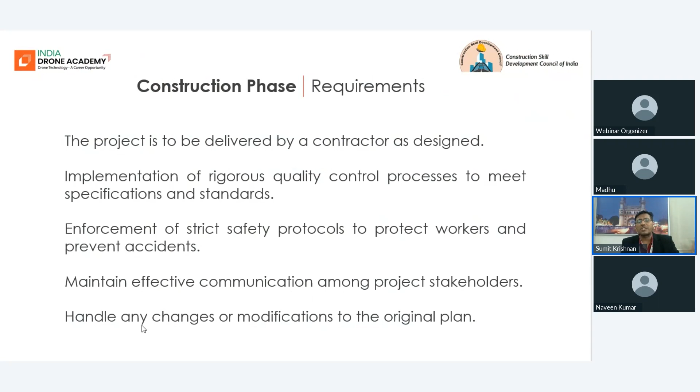So these on your screen, 1, 2, 3, 4, 5, these 5 points are the important requirements of any construction phase in the construction project work. Now, when a project engineer wants to meet these requirements, there are some challenges that he faces. What are those challenges? First challenge is to get a skilled labor. If the laborers are not skilled, automatically the progress will slow down.

A project should meet all the regulatory requirements. Sometimes there are chances that the construction project work may cross the budget due to unexpected expenses. Like sometimes there may be chances of repeated works. Some work is done and it is not acceptable, then again the work has to be repeated. So that also increases the overall budget.

If the design changes that are required to be implemented are identified very late, then also it will affect the cost and the timings of every team. Because during construction work, there is not only one team who is working, there are several teams who are working together. So if one team delays their work, the schedule of all of the teams will get affected.

And maintenance of the inventory records, this is another challenge, because every time you have to order the raw materials, and you have to track whether the raw materials available on the site are enough or not. So all these things, and a record of all the important machineries that are available on the site, all these things need to be recorded in the inventory. These are the challenges of the construction phase.

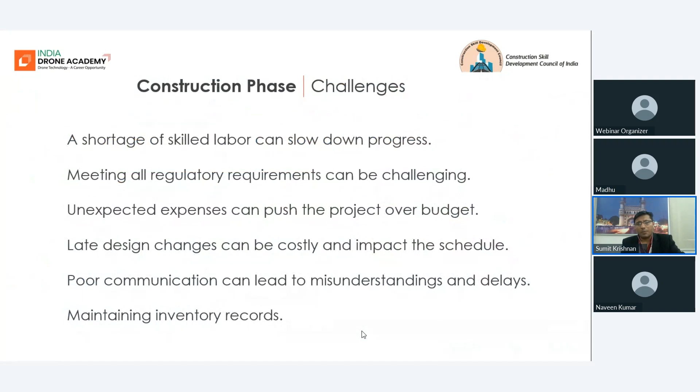If we talk about construction progress monitoring specifically, which is our topic today. During the construction phase, construction progress monitoring is a very important stage that ensures that all the challenges are overcome so that the requirements can be met. So construction progress monitoring, what does it mean? Is it just about tracking the activities of the laborers who are working on the site? Is that all construction progress monitoring means?

I will say no. If you try to get into the detail of this term, construction progress monitoring actually involves many things within it, which we shall discuss today, and how drones can help a construction project engineer to effectively do this construction progress monitoring. This construction progress monitoring is about weekly or monthly site assessment. And this assessment is done to ensure that whichever work is completed matches well with the plan and design that was already done in the previous phases. Okay.

So in construction progress monitoring, how will the assessment be done? A project engineer has to visit the site and he will verify the level of work that is existing, that is done, and he will also inform all the investors about the progress. And the information is not just on telephone calls. There is a well documented procedure which he has to prepare. He has to prepare proper documentation after his visit, and he has to share this with the project engineer, with the investors, with the end user, with everyone. He has to share the progress report. So let us move ahead.

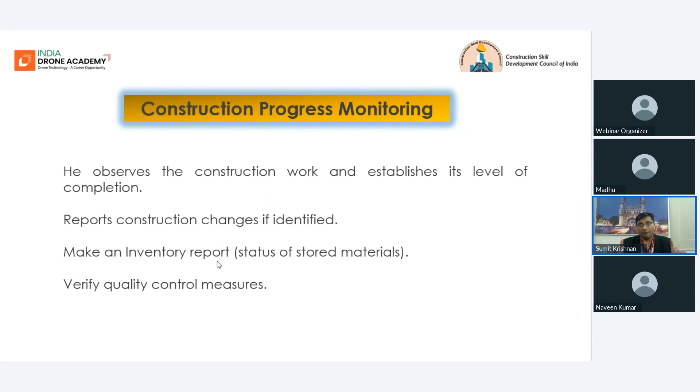There are some raw materials that are always getting purchased for the construction work. Those raw materials are to be recorded. He also has to note down all the active machineries on the site that are functioning, because those are all very costly items. So proper inventory is required. And then it is the same project engineer who also has to ensure that the quality control measures have been taken and these are implemented. Okay.

So what is the difference between the traditional method of progress monitoring and a drone based progress monitoring? Let us compare. The traditional method of progress monitoring involves that a project engineer should walk through the site on foot, through the entire site, each corner. And this may take multiple hours or sometimes a few work days if he wants to make the report complete. And sometimes there are chances that he may miss some of the sections of the construction site, because those sites may not be accessible to him.

Like he can be just on the ground. He cannot climb the unsafe structure to identify if the structures are well fixed or not. So he cannot go to the top of the unsafe structures. So all these limitations will not allow the report to become a comprehensive report. That report will definitely not be a very complete report. It will lack a lot of information about the construction site.

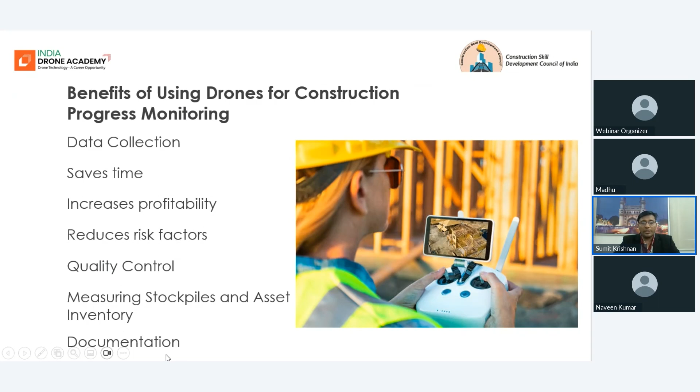When I'm talking about data collection, drones are capable of collecting large amounts of data that is not traditionally possible by just capturing with the eyes and documenting everything in the report. Drone data is of multiple types. It will take photos of the site, which will show you the progress of construction.

Drones will capture very clear, high definition videos, which will allow a complete overview of the infrastructure. You are able to capture the infrastructure from any angle, any orientation, where manual inspection was not possible. And drone data can also get you a 3D model or maps of your construction project site, and this will help you in further designing, planning and analysis.

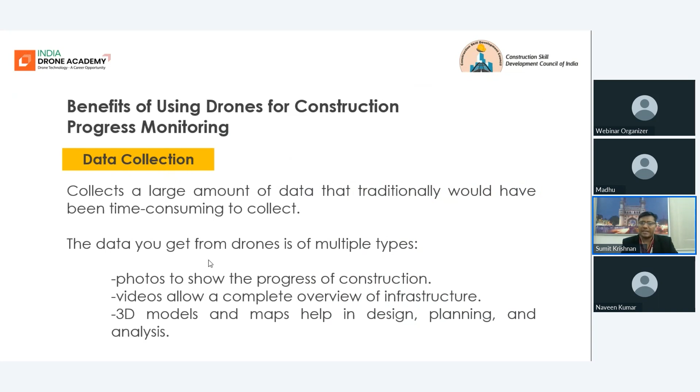The drone can produce orthomosaic maps, lidar scan maps. It can get you thermal maps. These all maps carry details which are impossible for any human eye to see. Okay.

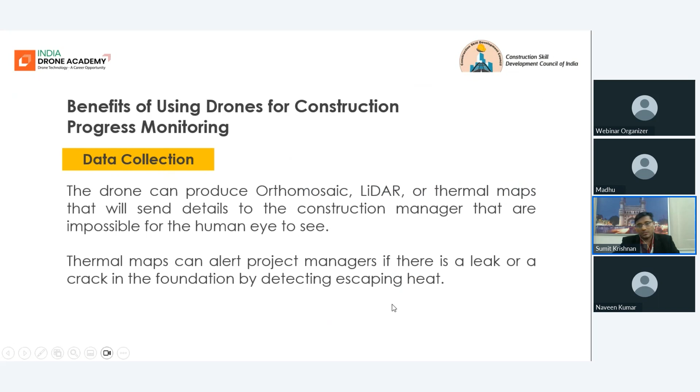Thermal maps can alert the project managers if there is a leak or any crack in the foundation by detecting the escaping heat. We can see here, this is one of the buildings, and this building is captured by a thermal camera drone, where one can see the temperature patterns on the walls of the building.

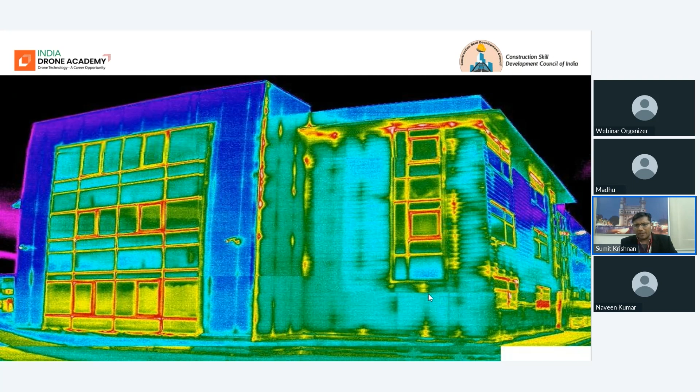So this thermal scanned picture of this building can give you the information about the heat leakage issues, which are those surfaces that are making the heat flow off the structure. After the construction, buildings have one very common issue of roof leaking. Heat escapes from the roof. So all these things can be detected using the thermal cameras.

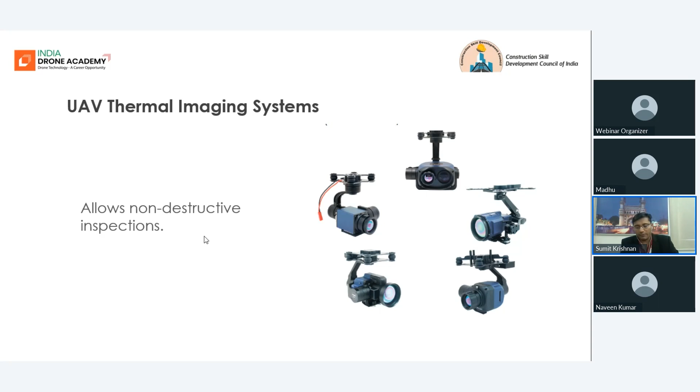Okay. So what is the benefit of using these thermal imaging systems? These thermal imaging systems on drones help non-destructive inspections. Okay. These look very simple, but their results are very beneficial. Many construction companies are now taking help of these thermal imaging systems. Believe me, just go through the internet and find out more about the thermal imaging systems of UAVs. UAV means unmanned aerial vehicles. You all know. You have attended the first class, so you all know these terminologies.

And what is the benefit of this LiDAR scanned image of the building in construction? The advantage of having this kind of model is it allows very accurate measurements. Okay, you can measure the length of the structures that comprise this building, and you can just match it with your design layout. And believe me, these allow very accurate measurements. I have included this detail.

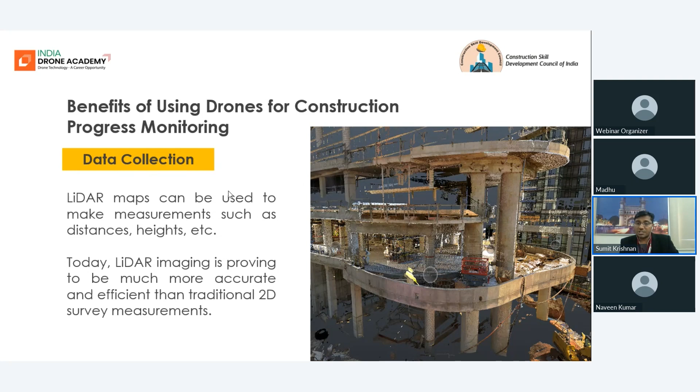Today, LiDAR imaging is proving to be much more accurate and efficient than traditional 2D survey measurements. So during construction progress monitoring, this kind of data from the drone can be very, very helpful for the project engineers. This is another image of the construction site.

Another benefit of using drones for construction progress monitoring is time saving. Drones save lots of time on inspection and communication. Of course, it doesn't matter whether your construction site is a large scale construction site. Your drone can very quickly fly, collect the data and get it to you in minutes. Okay, it increases the profitability. How can it increase the profitability? Because using drones, you are also reducing some unnecessary labor on the site.

For example, you may be asking some of the laborers to go to the top of an unsafe structure and do the inspection work. So why put those workers in a situation of risk when the drone is with you, which can very easily go to that structure and take a complete 3D image of that object, and this can help you reduce the cost of your project.

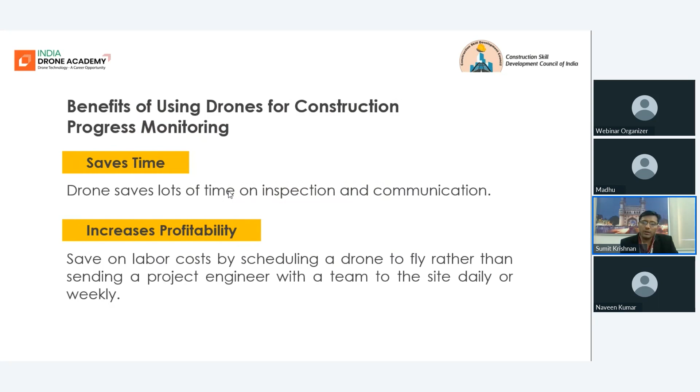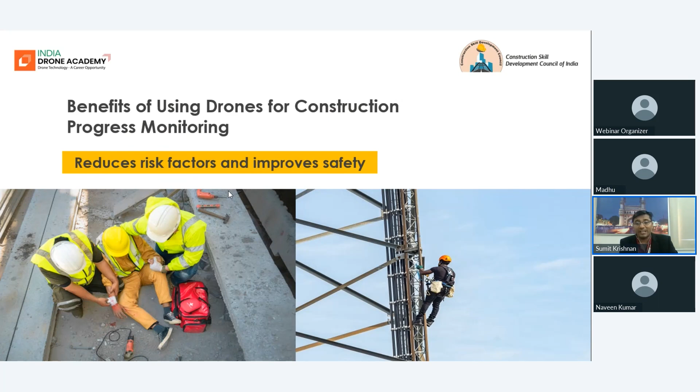Okay, so I have already discussed this point with you, that it reduces the risk factors, and therefore it improves safety. Okay, you can see in the right image, the worker is climbing the structures, and it is really very unsafe for him. There are many instances where workers have fallen to the ground and lost their lives. Such things can definitely be avoided if you are using drones in your construction.

Okay, quality control inspection. As I have shown you, during construction progress monitoring, quality control inspection is one of the important responsibilities of the project engineer who visits the site. Right, we have seen the responsibilities of the project engineer who has to visit the construction site for progress monitoring.

Quality control inspection is one of his important responsibilities. Using drones, you can easily detect any threats, even the minor cracks and defects which are associated with your buildings, your construction site. There's a very high chance these defects can be missed from the ground level. You cannot see that, but drones can get you the information of these minor defects, and therefore it enhances the quality control of your project.

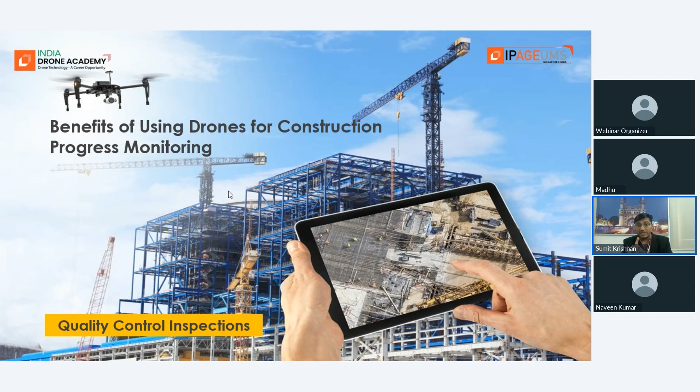And the importance of quality control, every civil engineer and person involved in construction knows, because they have to meet the regulatory requirements and compliance. Right, the next important benefit is measurement of stockpiles and asset inventory. What is a stockpile? A stockpile is maintaining the stocks of the raw materials that you are using for the construction work. So the drone can easily calculate through LiDAR scanning what volume of stockpile is available with you at the construction site.

And it is not just the case. Even during construction progress monitoring, sometimes you have to do some filling and cutting on the site. Some portion of the ground has to be cut, while some portion of the land is to be filled. So how much earthwork is required? You all as civil engineers must be familiar with the earthwork terminology. How much earthwork is required if you want to do this much cut on the land? That amount of earthwork can be calculated with the help of these drones.

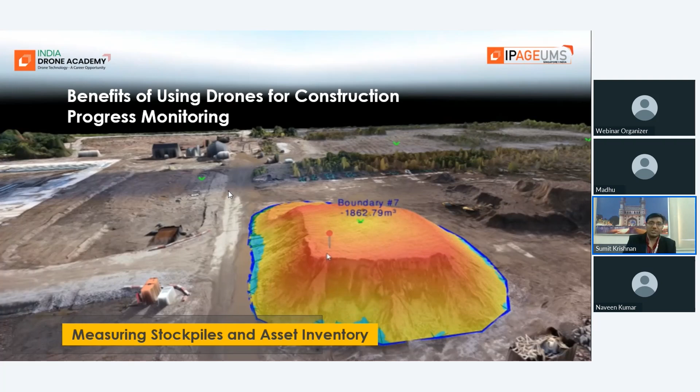And believe me, drones can get you a very accurate value of the amount of earthwork required. So you don't have to unnecessarily go on and start cutting down the land. You will know in advance how much is to be cut.

Documentation. When the site visit gets completed, the construction progress monitoring still does not end, because the project engineer has to make a good documentation report. First of all, when you are using drone images in your documentation, it will make your report very complete and very easy to understand. And also all the drone images have geotags associated with them. Sorry, the sentence is incomplete here, but I can help you in understanding. All the drone images have geotags associated with them.

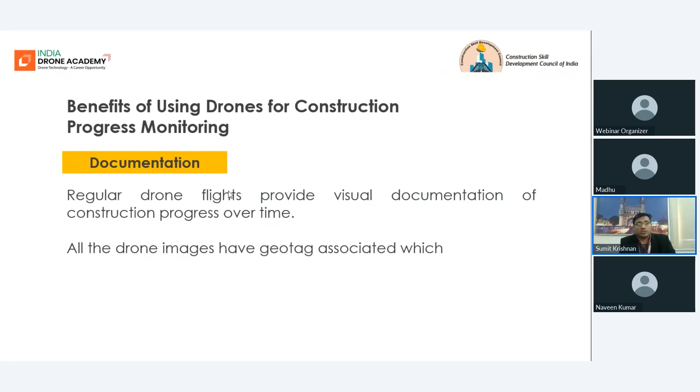Geotag means when the drone is taking images during its flight, those images have latitude and longitude coordinate data connected with them. So when you copy the images from your drone, you don't only get the images, you get the latitudes and longitudes of those images as well. That is how a 3D model, a complete exact replica of the site, can be created using various photogrammetry software like Pix4D. So this is the importance of geotags with drone images.

So overall, we can definitely say that if we are using drones for construction progress monitoring, it is helping you with a lot of things. You can do the quality control, you can do the documentation work, and we have seen the types of data it collects are helpful in various ways. It also eliminates the risk of making workers walk across unsafe structures. It has very wide coverage, it takes very little time, and it is comparatively not that expensive. Believe me, it is not that expensive.

If you're using drones, it will help you build a reputation in the construction industry, because these visuals from drones combined with a regular traditional progress report become overall a powerful tool. And this can develop strong relationships with the clients, the investors, and the management. So I hope how beneficial the drone is for progress monitoring and documentation purposes is very much clear to you.

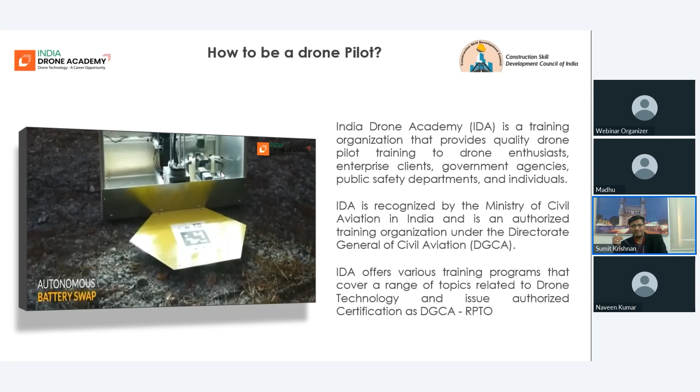So this was a short introductory video of our training academy, India Drone Academy, which is headquartered at Hyderabad, and we are expanding our campuses pan India, and we provide the basic drone flying training plus the specialization courses on drones on various applications. Okay.

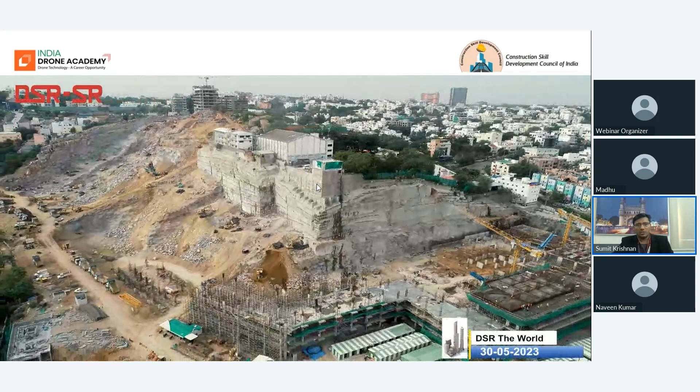So now this is the second video, which will give you a glimpse of construction project monitoring done by our company for DSR site. So this is just the short glimpse of it.

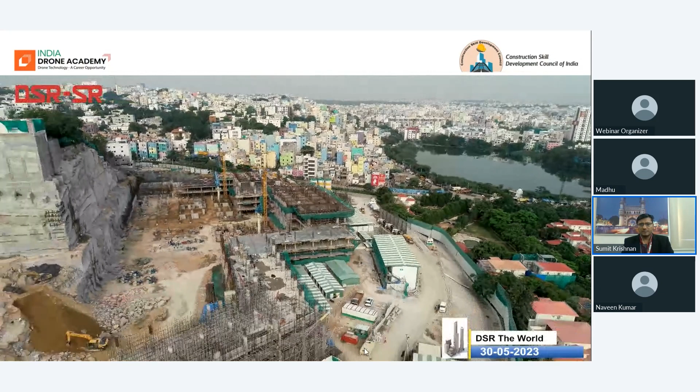With this, I would like to conclude this session because I could not show you more videos about our construction monitoring activities. This was just to give you a glimpse of our services and our involvement in the construction industry services. Okay, so we are providing services to the construction industries, and construction industry is now becoming the #1 user of this drone technology. They are getting benefited a lot.

I have already shown you in the previous session where the survey was done, and the survey results from various companies have reported the level of use of the drones for various phases of construction project. Okay, so it is very helpful. You all should definitely learn this technology so that you all can get benefited in your field.